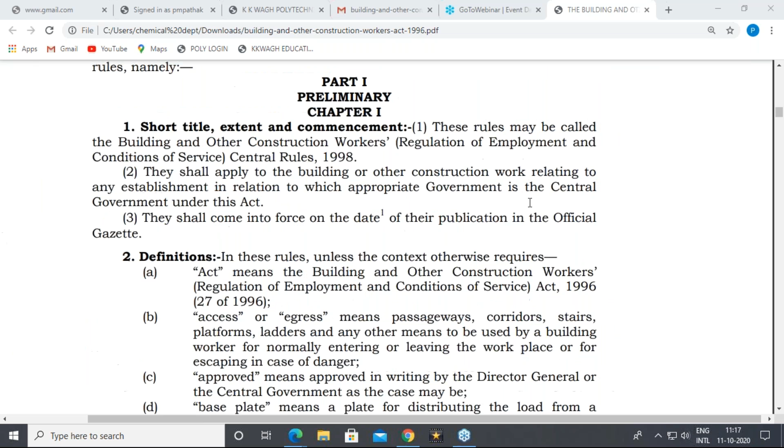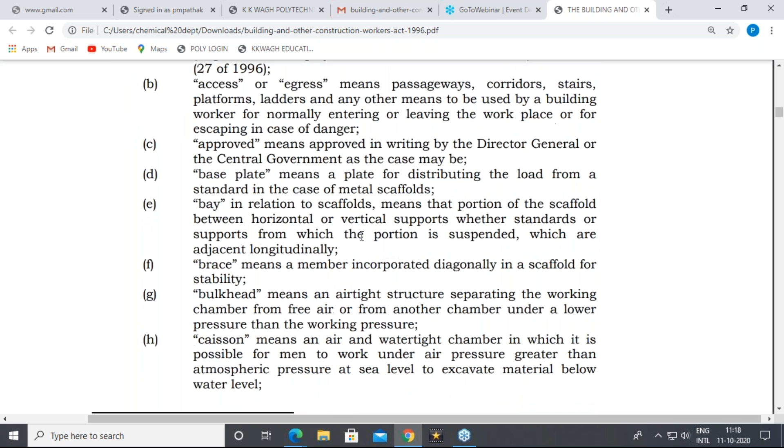So different definitions. The general definitions are act, then access or egress. Access or egress is nothing but the passageway, corridor, stairs, platforms, ladders and any other means to be used by a building worker for normally entering or leaving the workplace or for escaping in case of danger. Then approved, base plate, bay, brace, bulkhead, caisson are the different definitions given under Rule 2.

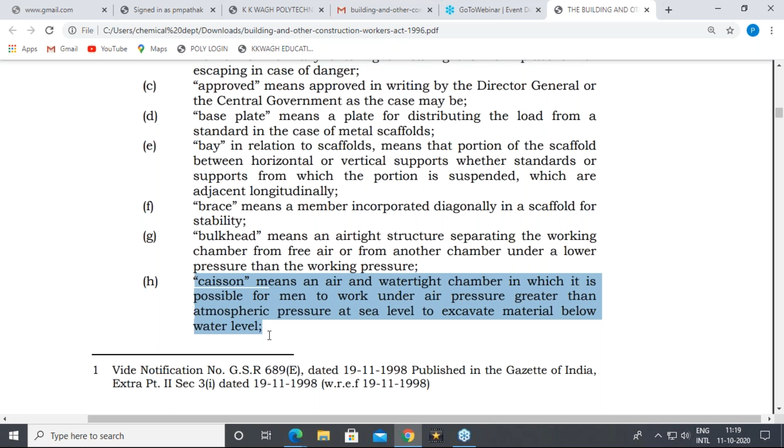So what is a caisson? It means an air and watertight chamber in which it is possible for men to work under air pressure greater than the atmospheric pressure at sea level to excavate material below water level. So if you want to work under water level, you can create air pressure which is more than the atmospheric pressure, and the building worker or other construction worker can work in this type of chamber, which is called a caisson. So this is the definition given under this rule.

Then cofferdam is another definition which is not known to common people. Cofferdam means a structure constructed entirely or in part below water level or below the level of the water table in the ground and intended to provide a place for work that is free of water. So it is a water-free place under the water table or water level, and it is called a cofferdam.

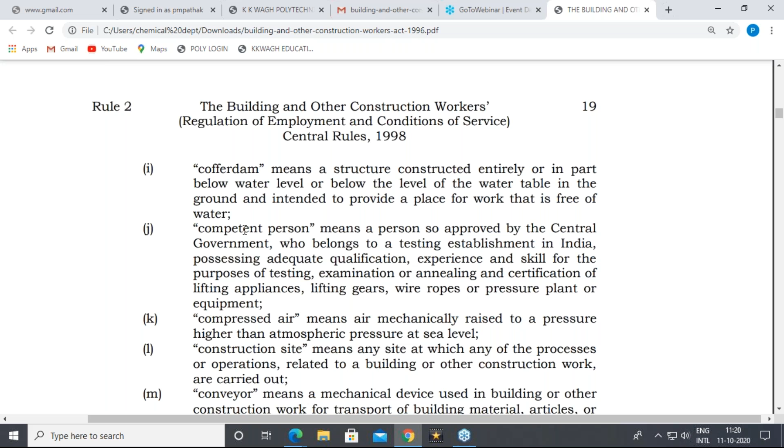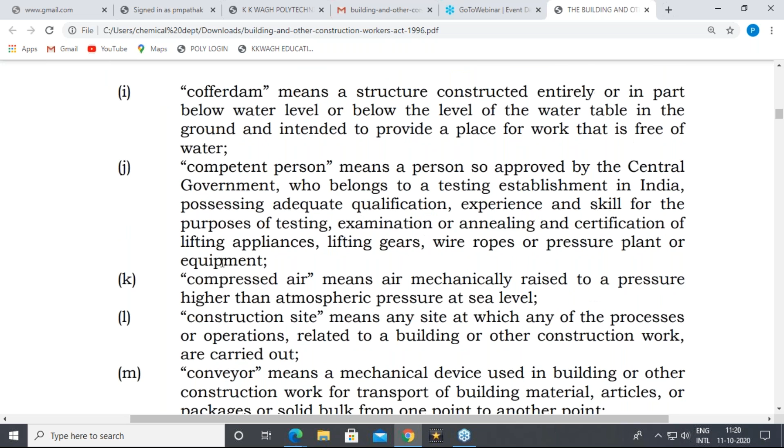Then competent person, we know the general definition of the competent person; that is the same and it is applicable to the building and other construction workers rules. Then compressed air, we know that definition. Construction site, we already discussed this establishment in the previous session. Then conveyor means a mechanical device used in building or other construction work for transport of building material, articles or packages or solid bulk from one point to another.

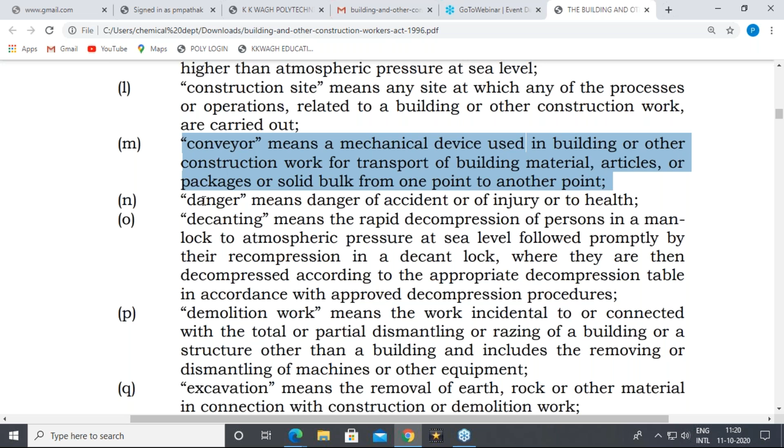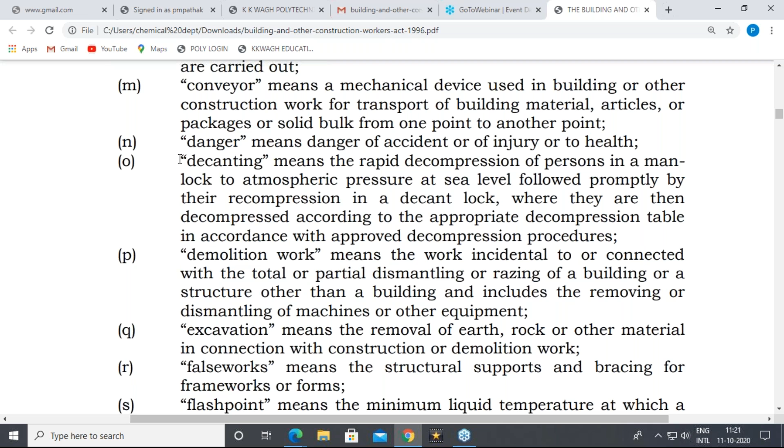Then danger is the general definition. Then decanting means the rapid decompression of persons in a manlock to atmospheric pressure at sea level, followed promptly by their recompression in a decant lock, where they are then decompressed according to the appropriate decompression table in accordance with the approved decompression procedures. So whatever decompression and recompression procedure is followed, that is called the decanting process.

Then demolition work. We have already discussed demolition work in one of the sessions. The work incidental to or connected with the total or partial dismantling or razing of a building or a structure other than a building, and includes the removing or dismantling of machines or other equipment. So dismantling of machines, other equipment or building material is called demolition.

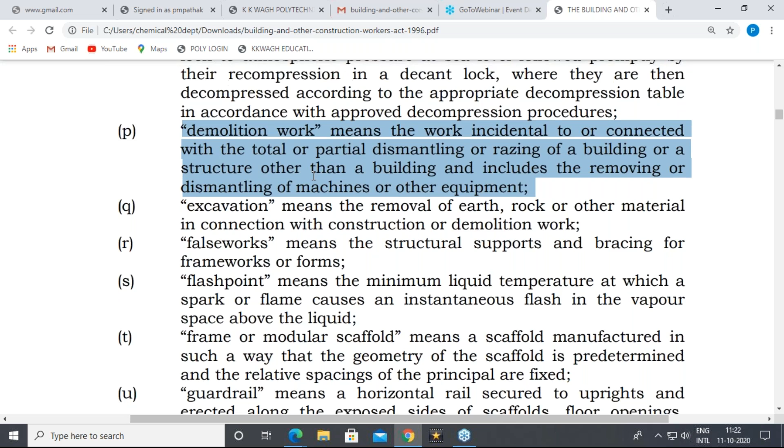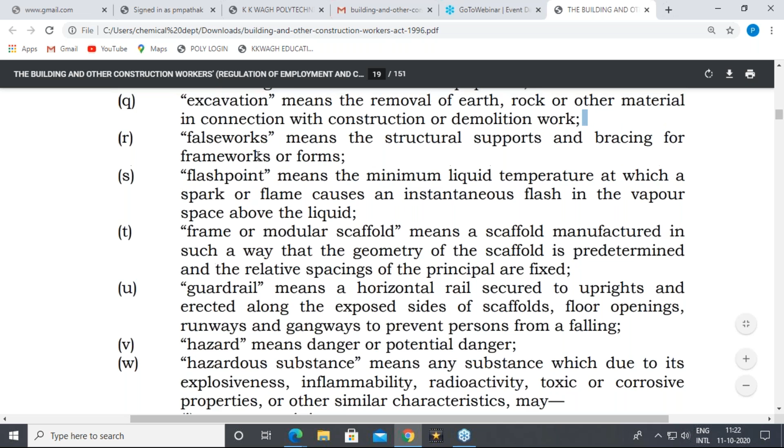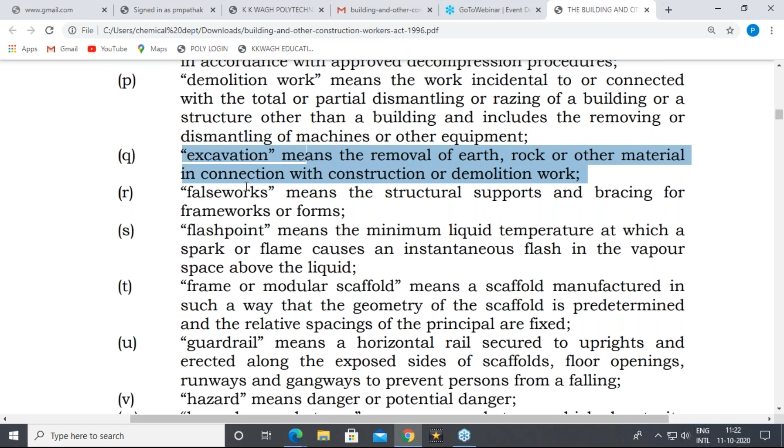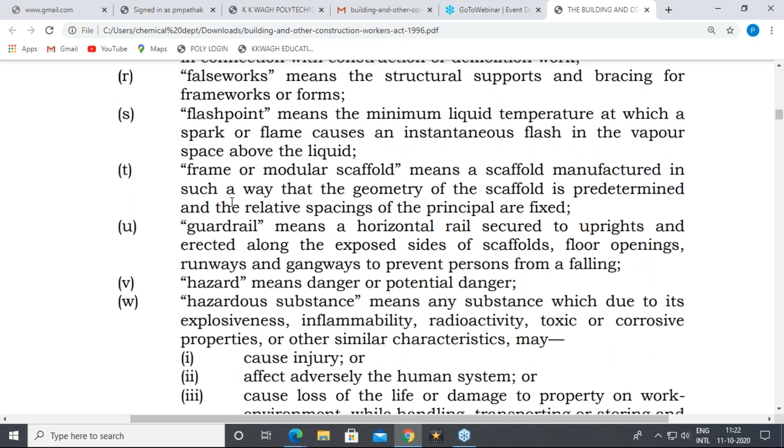Then excavation means the removal of earth, rock or other material in connection with construction or demolition work. Excavation equipment and activities are all discussed in the construction activities session. Then falsework means the structural supports and bracing for formwork or forms. Flashpoint we have already discussed in the safety of chemicals. Frame or modular scaffold we have discussed in ladders and scaffold structures.

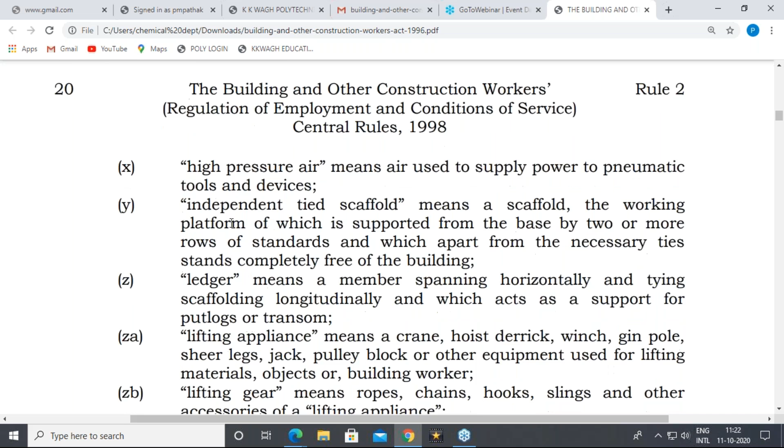Then guardrails, hazards, hazardous substance, high pressure air, independent tied scaffold, ledger, lifting appliances. At the construction site, we can use a crane, hoist, derrick, winch, gin pole, shear legs, jack, pulley block or other equipment used for lifting materials, objects or building workers. All these are called lifting appliances, whether the lifting is of building workers, objects, or any type of material.

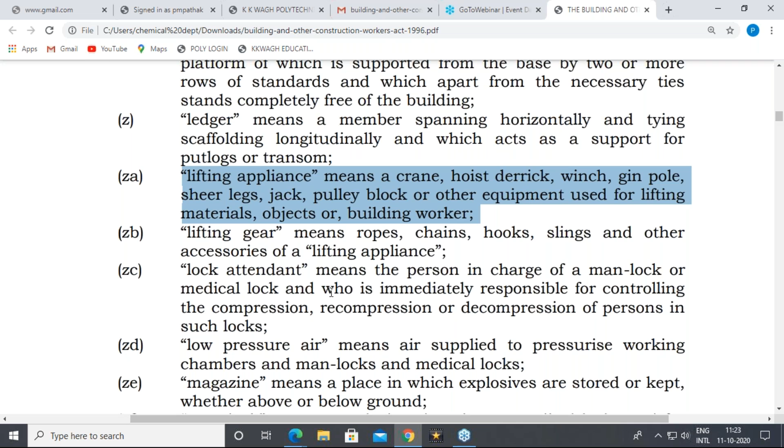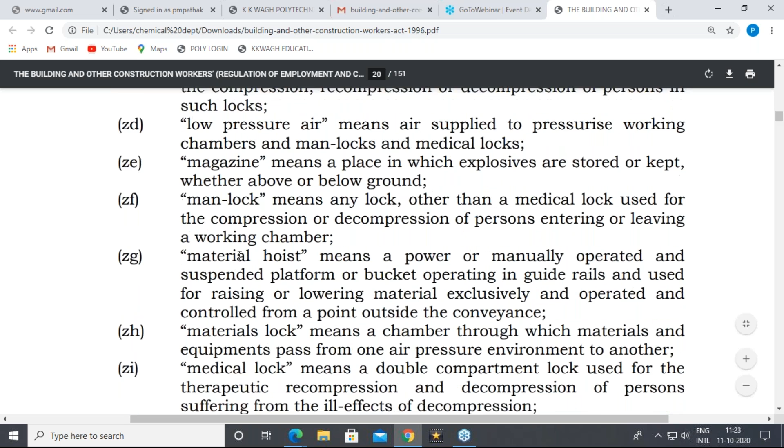Then lifting gear, lock attendant, low pressure air, magazine, man lock, material hoist, material lock, medical lock, the national standards.

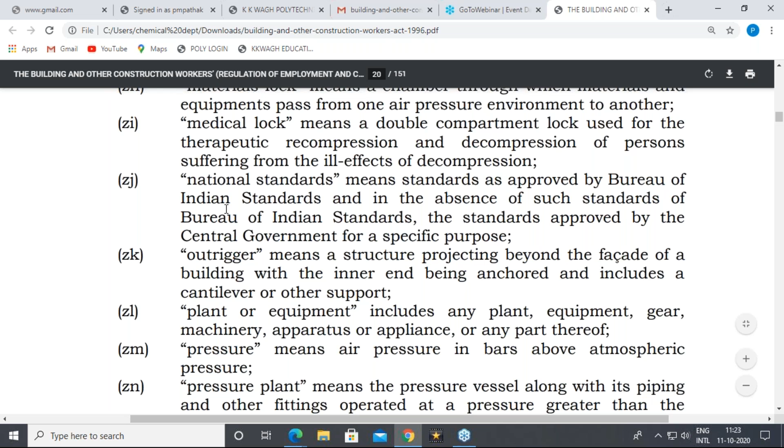So BIS is going to use in these rules also, that is why it is a national standard. Then outrigger means a structure projecting beyond the facade of a building with the inner end being anchored, and includes a cantilever or other support; that is called an outrigger.

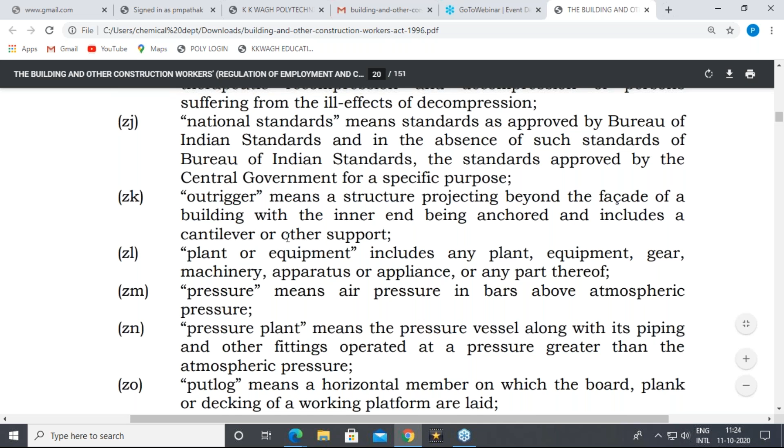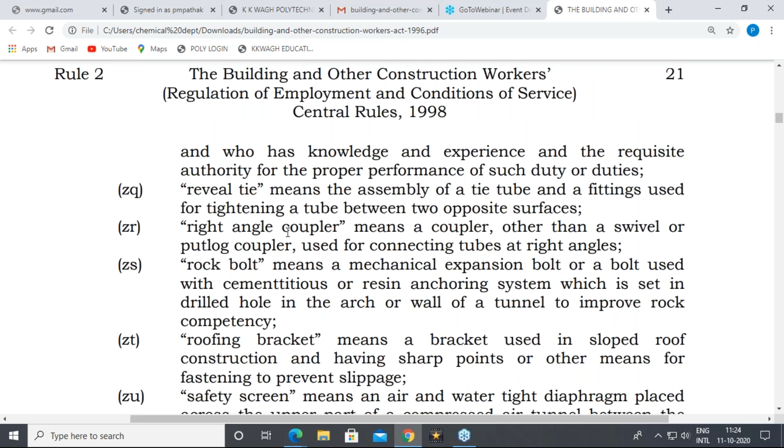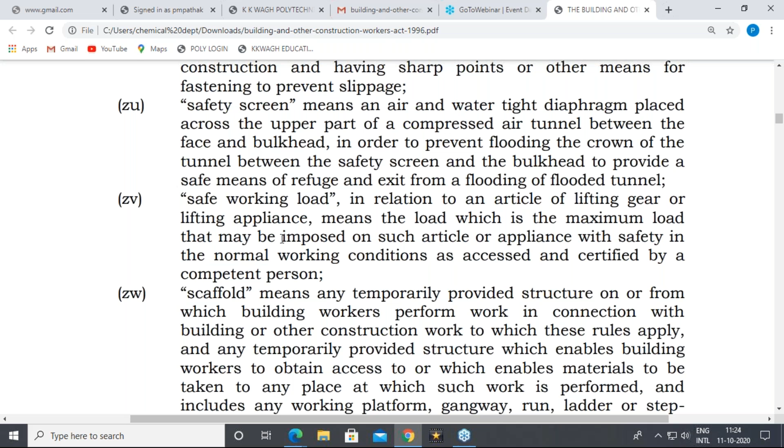Then plant or equipment, pressure plant, putlog, responsible person, that is nothing but the employer. Then reveal tie, right angle coupler, rock bolt, roofing bracket, safety screen, safe working load, scaffold, then schedule, segment, service shaft, shield, then sole plate, sound or good construction, sound or good material,

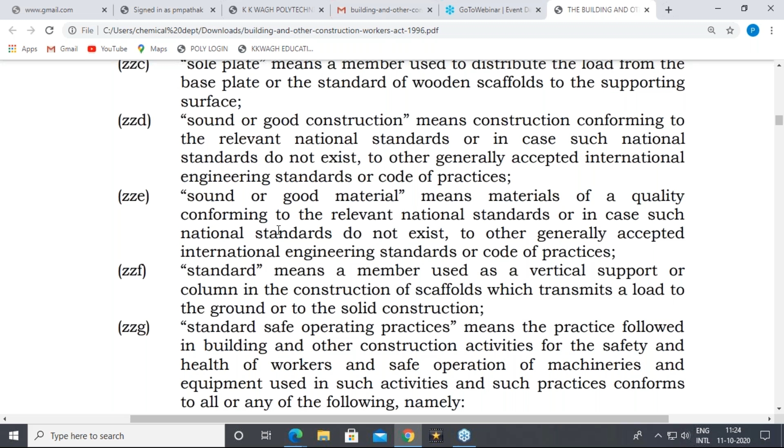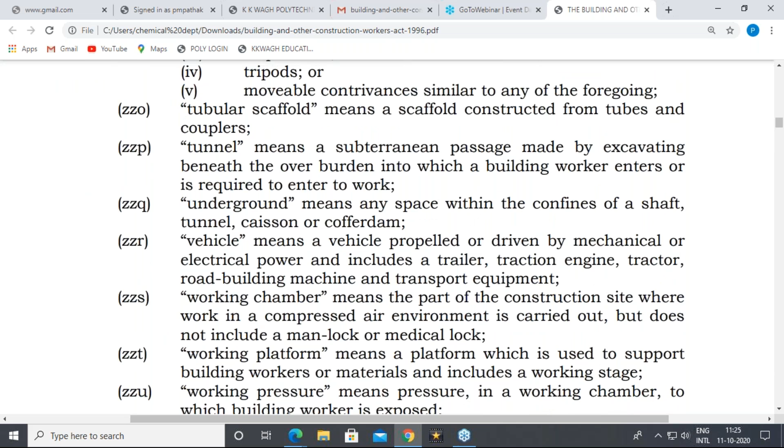standard safe operating practices, steel rib, then suspended scaffold, testing establishment, tie, toe board, transom, trestle scaffold, then tubular scaffold, tunnel, underground, vehicle, working chamber, working platform, working pressure, workplace. So these are the different definitions involved in rule number 2.

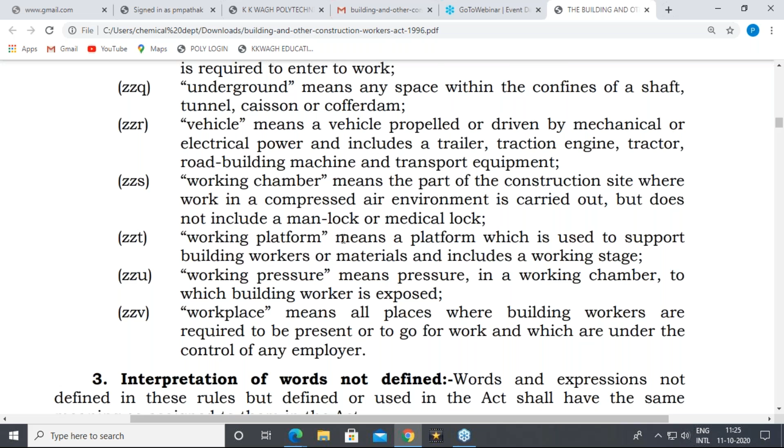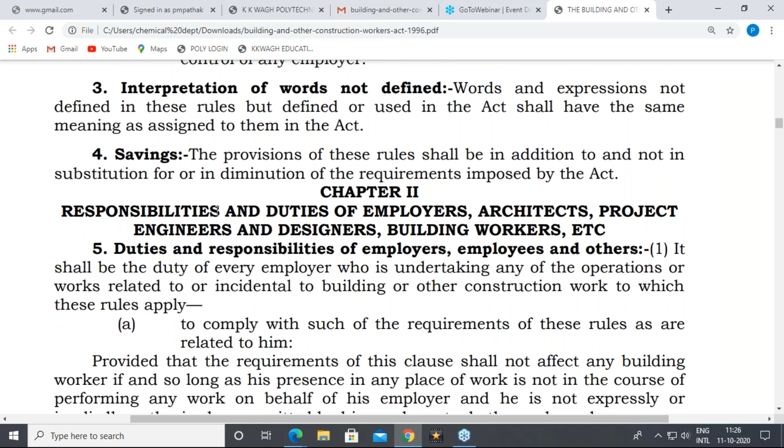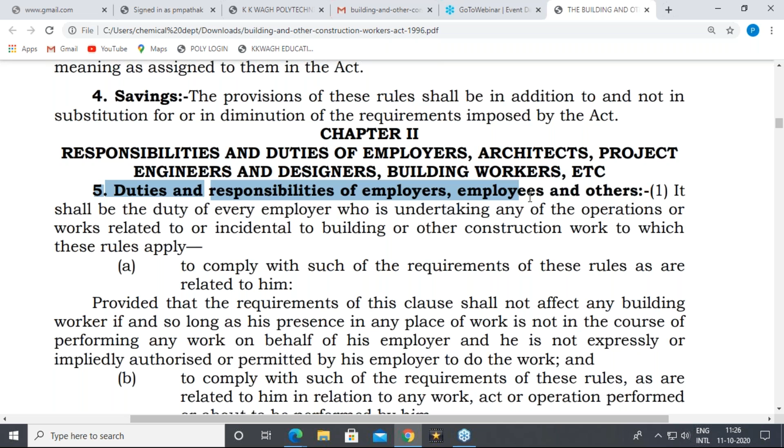Then chapter 2 gives you the idea regarding the responsibilities and duties of employers, architects, project engineers, designers, building workers, etc. So whatever the manpower involved in this establishment or the activities, all are responsible for a particular work. So all these responsibilities are given under chapter 2. So rule number 5 gives the idea regarding the duties and responsibilities of the employer, employees, and others.

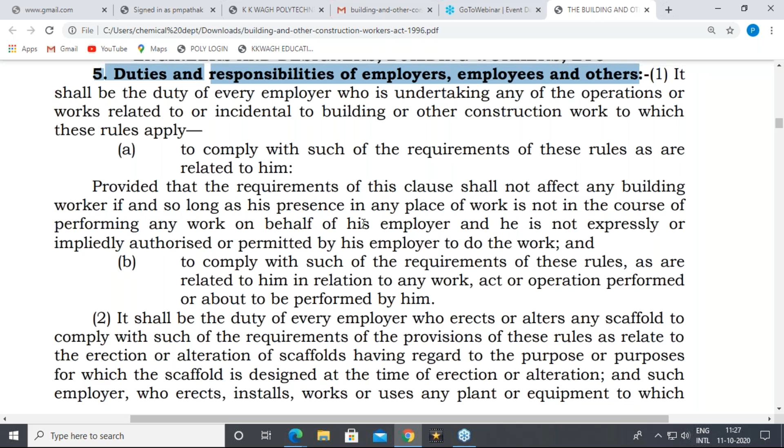So all these requirements given under the rules should be completed by the employer, and all the guidelines for compliance of these rules should be followed by the employees. So all the guidelines given by the employer should be followed by the employees. And the employer must have knowledge about this compliance, which is given under the different rules of this Central Rule 1998.

Then a contractor who is undertaking any of the operations or works to which these rules apply may appoint any artisan, tradesman or other person to perform any work or service under a contract of service. It shall be the duty of the contractor to comply with such of the requirements of these rules by these persons, that may be an artisan, tradesman or other persons.

So if there is a contractor in the establishment, then it is the responsibility of the contractor to complete all these activities mentioned in these rules, and that should be completed through persons like artisans, tradesmen or other persons. Then the employee's duty is to comply with the requirements and to cooperate with the contractor and the employer.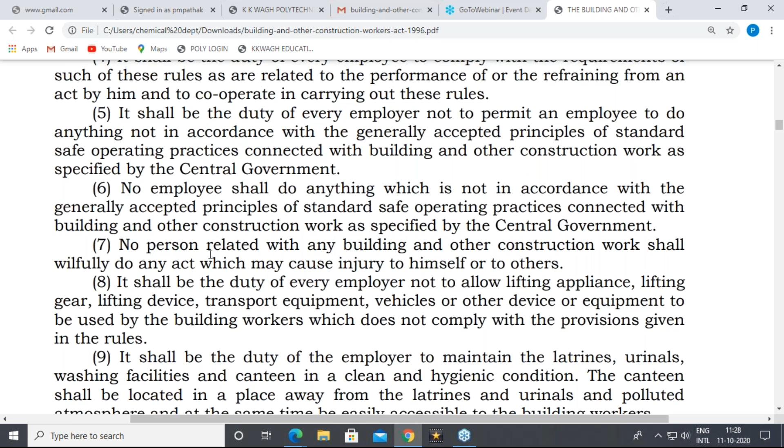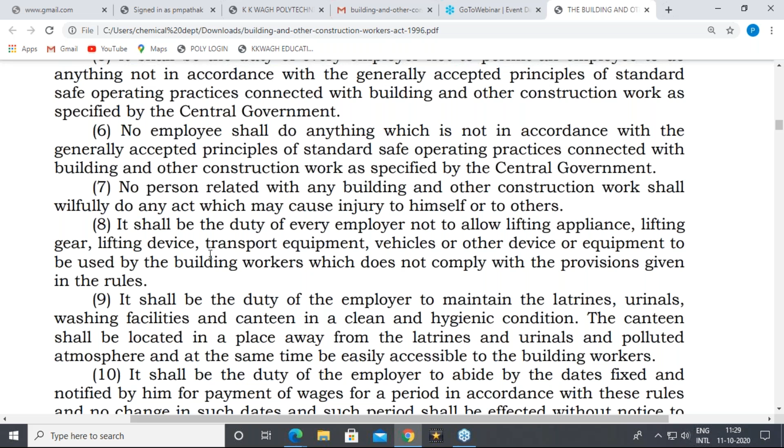And the employer's duty is to provide the different facilities required by the employees for safe work and safe practices, and also to provide facilities for lifting the material, lifting the objects or the different mechanisms. That may be transport equipment, vehicles or other things. Then it is the responsibility of the employer to maintain the latrines, urinals, washing facilities and canteen in a clean and hygienic condition.

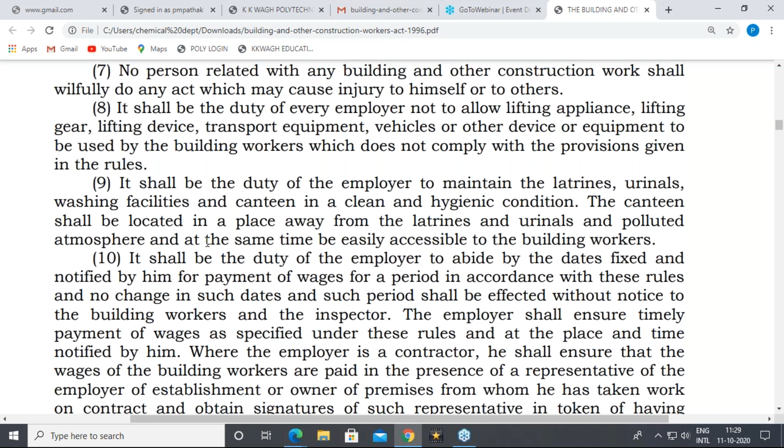Then it is the responsibility of the employer to abide by the date fixed and notified by him for the payment of wages for a period in accordance with these rules. So it is the duty of the employer to provide the wages time to time, that is the payment of wages in a particular period already decided between the employer and employees. Then it is also a responsibility of the employer to pay the contractor within a time period.

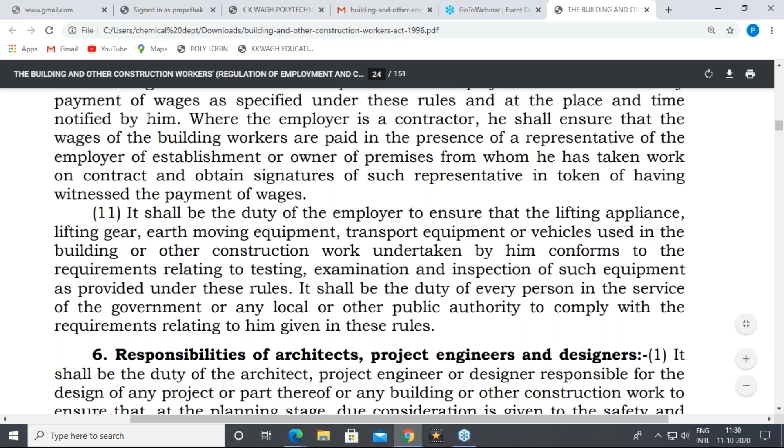Then it is a duty of the employer to ensure that the lifting appliances, lifting gear, earth moving equipment, transport equipment or vehicles in the building and other construction work undertaken by him conform to the requirements. Then there are provisions like testing, examination and inspection of the equipment used for earth moving, transportation, lifting, etc. So all these vehicles and equipment should be tested, examined or inspected by the competent person time to time, and that should be observed by the employee.

Then rule number 6 gives you the idea regarding the responsibilities of the architect, project engineers and designers. So whatever the establishment, building or other construction work, it should be designed taking into view the safety aspects, the health aspects and the long-term views.

So the designer is a key person, because before starting the actual construction activity, the designer should think about all these aspects, and mainly the safety of the workers, that is, the safety of the building workers.

Then after designing the safety establishment, the project engineer's and architect's role is to provide the guidelines: how to do this activity, how to complete all this establishment, what is the time for completing all these activities, what are the facilities provided for doing all these activities. That may be a material movement, a construction activity, a building worker movement, an object movement, a transport facility, etc.

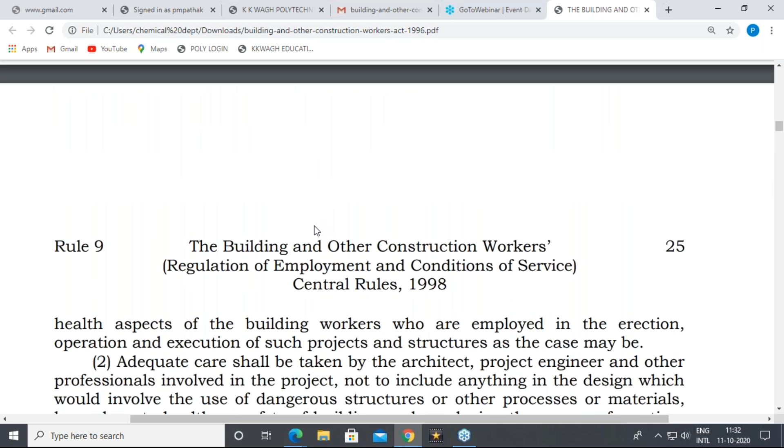So for all the things which are covered under the architect and project engineer, all these professionals should think about the building workers' health and safety first. They should also provide the guidelines for handling the hazardous materials involved in the construction activity.

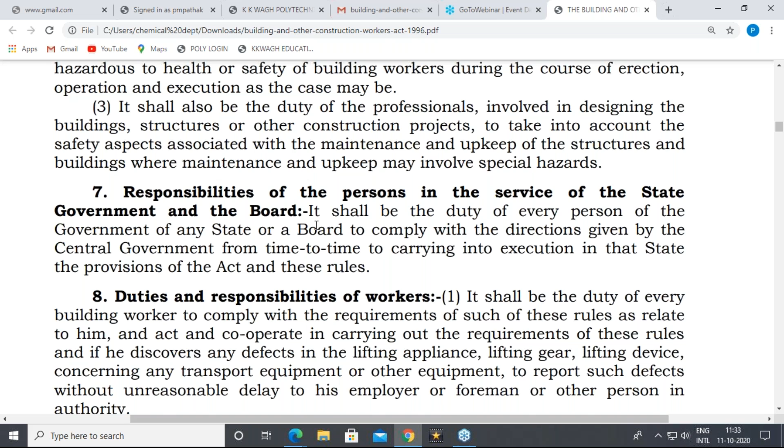Then rule number 7 is regarding the responsibilities of the person in the service of the state government and the board. So the persons who are involved in this activity also have the responsibility to follow the state government guidelines, central government guidelines, board guidelines, or the safety guidelines provided by the designers, project engineers, architect, or the employer.

Then rule number 8 is the duties and responsibilities of the workers. We have already mentioned that they must go through the trainings for handling the different equipment, that may be lifting appliances, lifting gear, lifting devices, transport, etc. Then the worker should cooperate with the employer, the project engineer, architect, or the designer in following all the guidelines given by them.

Then no building worker shall, unless duly authorized or except in case of necessity, remove or interfere with any fencing. So the worker should not interfere with the fencing facilities, gangways, gear, ladders, hatch coverings, life-saving appliances, lighting, or other things whatsoever required by the Act and the rules. If these are essential facilities provided by the employer as per the Act and rules, the worker should not interfere with them unless duly authorized or in case of emergency only.

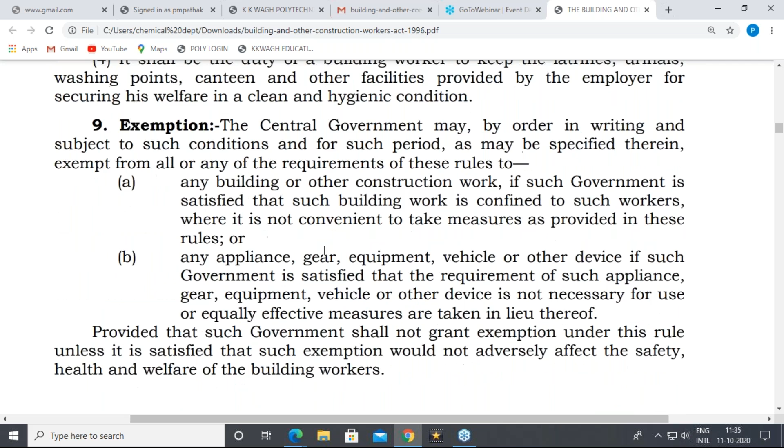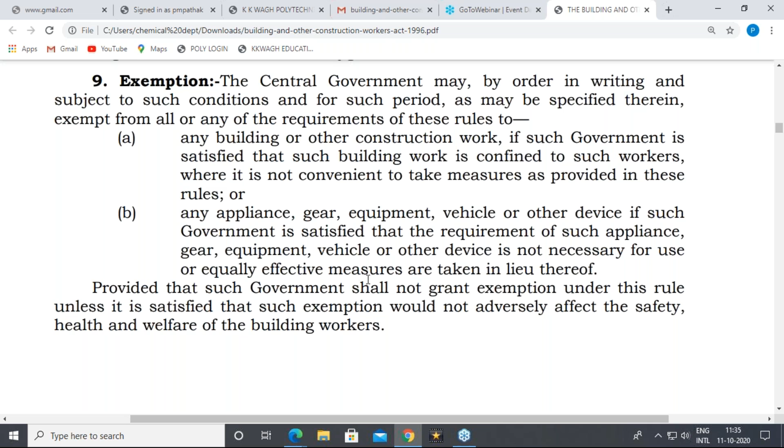Then rule number 9 is exemption. Some points, some facilities, some provisions may be exemption cases, but it should be decided by the central or the state government authority only. So these exemptions should be decided by the authorities only.

Then Part 2 of this Central Rules 1998 is the central advisory committee and registration of establishment. Chapter 3 under Part 2 is the central advisory committee. We have already discussed this central advisory committee in the Act 1996. It is similar in rule number 10: a chairperson of the central government, then 3 members of Parliament, of whom 2 shall be elected by the House of the People and 1 by the Council of States.

Then the Director General, member ex officio; the Director General, Labour Welfare, Ministry of Labour, New Delhi, member; the Director General, Factory Advice Service and Labour Institutes, Mumbai, that is DGFASLI, member. 4 persons, out of whom at least 1 shall be a woman, nominated by the central government representing the building workers. Then 4 persons nominated by the central government representing the employers connected with building and other construction work.

2 persons nominated by the central government, one from the national level association of architects or engineers and one from accident insurance institutions. So the guidelines for deciding these committee members are given in the Act 1996, and the detailed guidelines for specific members, the number of members, restrictions, and from where these members should be decided are all covered under rule number 10. Then terms of office.

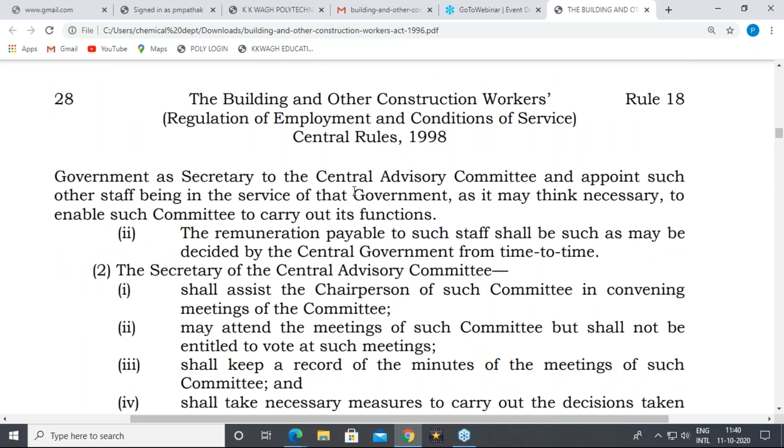Rule number 16, that is manner of filling vacancies. So we have already discussed that in case of resignation or removal of any member from the committee, you can fill these vacancies as far as the central government authorities and chairperson of the committee are concerned. Rule number 17, staff of Central Advisory Committee. So you can appoint the supporting staff under the chairperson and the different members.

Then rule number 18, allowances of these members. So the central and state government is going to decide the traveling allowance and the other allowances which can be given to these members. Then rule number 19 gives you the idea regarding the disposal of business. Then rule number 20 gives you the idea regarding the meetings of these central advisory committees. So there shall be at least one meeting in 6 months. That is the basic condition required. You can have more than one meeting in 6 months also, but that is the minimum condition.

Rule number 21 gives you the idea regarding the notice of meetings and list of business. So whatever the meeting points, the dates and timings and the location decided by the Central Advisory Committee, that should be communicated to all the members with the help of the notice.

Then quorum: no business shall be transacted at any meeting of the Central Advisory Committee unless at least 6 members of such committee are present in that meeting, which shall include at least one member of parliament. So that is the condition: at least 6 members should be present for that meeting, and at least 1 member of parliament should be there. Then and then only these decisions can be communicated to the other establishments or the employers.

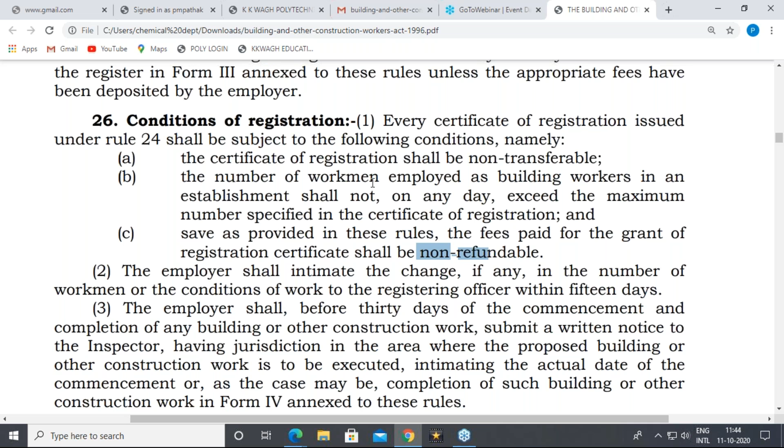Then fees for this registration: up to 100 workers, 100 rupees; more than 100 up to 500, 500 rupees; more than 500 workers, it is 1000 rupees.

Then chapter 5 is related to the appeals, copies of orders, payment of fees, etc. So you can file the appeal before the appellate officer if you are having some objection, if you are having some doubts, if you are deciding some points, or if you are going to give some suggestions, you can go for the appeal with reference to this rule number 28.

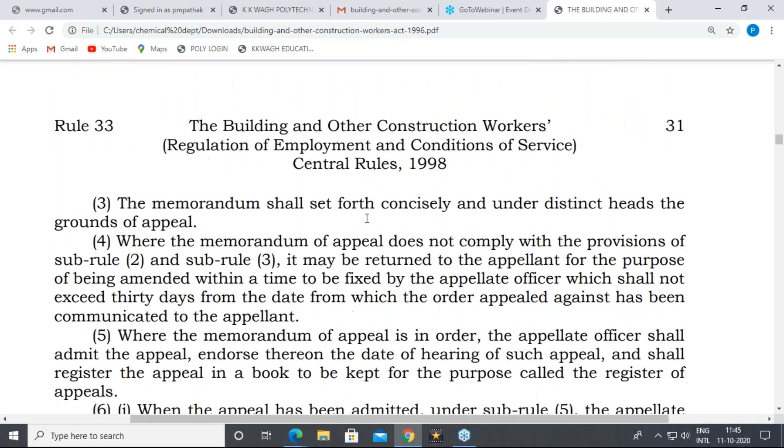Then 29, failure to appear on the date of hearing. So if you have appeal for something, and the date is decided by the concerned authority, and you are not going to appear for that hearing, then if the appellant does not appear, the appellate officer may dismiss the appeal for default of appearance of the appellant. So if you have not attended that hearing, then your appeal is automatically dismissed by the officer.

Then rule number 30, that is restoration of the appeal. So in case of dismissal of that appeal by the officer, it can again be restored for considering some of the specific cases. Then again, hearing of appeal: you have to attend this hearing, confirm, reverse or vary the orders appealed against, and determine the different points, and you have to mention the different decisions discussed in the hearing of appeal. Then you can ask for the copy of the registration order in the appeal itself.

Then regarding the payment of fees, you can ask about the fees which are already paid, the fee receipts and the registration fees, etc., with reference to this rule number 33.

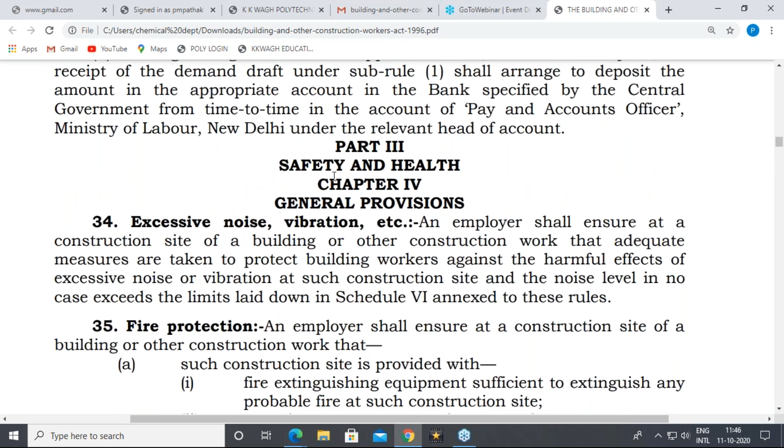Then part 3 is related to safety and health. So that is the important part as far as the building workers and this rule are concerned. So in chapter 4, there are general provisions. Rule 34 is related to excessive noise, vibrations, etc. An employer shall ensure at a construction site of a building or other construction work that adequate measures are taken to protect building workers against the harmful effects of excessive noise or vibration at such construction site, and the noise level in no case exceeds the limit laid down in Schedule 6 annexed to these rules.

So whatever limits are laid down in Schedule 6 of these rules, we have to follow these maximum permissible decibel limits decided in the schedule, and it is the responsibility of the employer to ensure the maximum permissible limits under this Schedule 6.

Then fire protection. So this is again the responsibility of the employer, that there should not be any fire incidents, and in case of such fire incidents, you have to protect the building worker from these types of fire hazards with the help of fire extinguishing equipment. And fire extinguishers should be available in sufficient quantities at that site, and adequate water supply should be provided as per the national standards, as per the BIS.

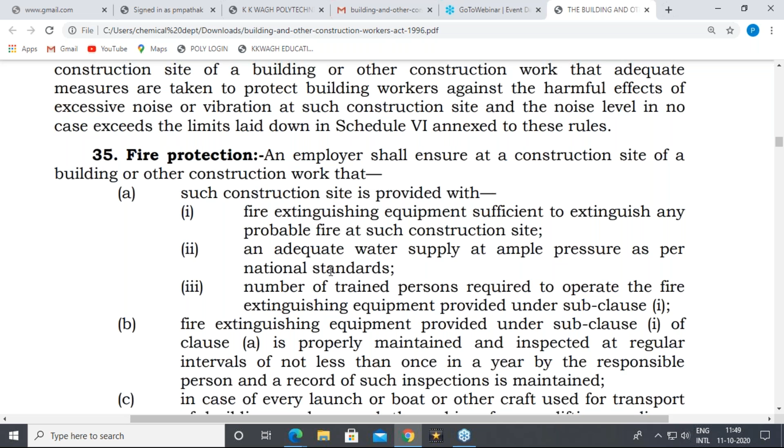And some people who are trained in fire extinguishment should be available to operate this extinguishing equipment at that site. So all these types of equipment and the trained people should be available at that site for protecting from fire.

Then emergency action plans. So as far as the different hazards are concerned, we must plan the emergency action plan to handle emergencies like fire and explosion, collapse of lifting appliances and transport equipment, collapse of buildings, sheds or structures, gas leakage or spillage of dangerous goods or chemicals, drowning of building workers, sinking of vessels, landslides getting building workers buried, floods, storms, and other natural calamities, which is prepared and submitted for the approval of the Director General.

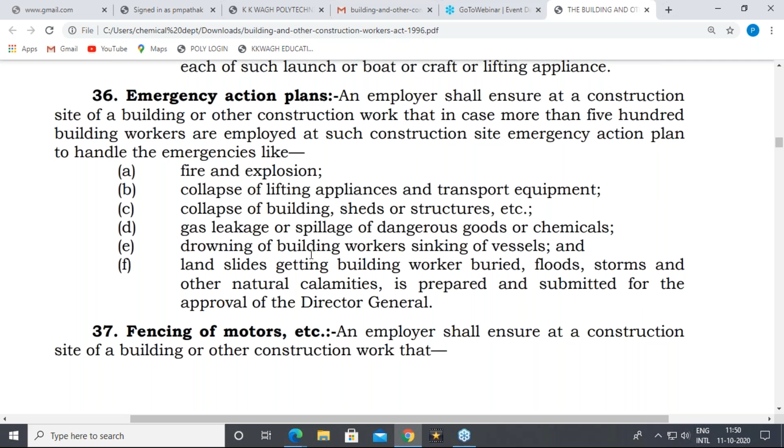So we must think of all these types of hazards, natural calamities or dangerous incidents, and in view of these incidents, we must plan the emergency action plan to handle these types of emergencies.

Then rule 37, fencing of motors. So all the motors which are used at the construction site and having different parts, like cog wheels, chains, friction gearing, flywheels, shafting, and dangerous moving parts of machinery, all should be fenced or lagged.

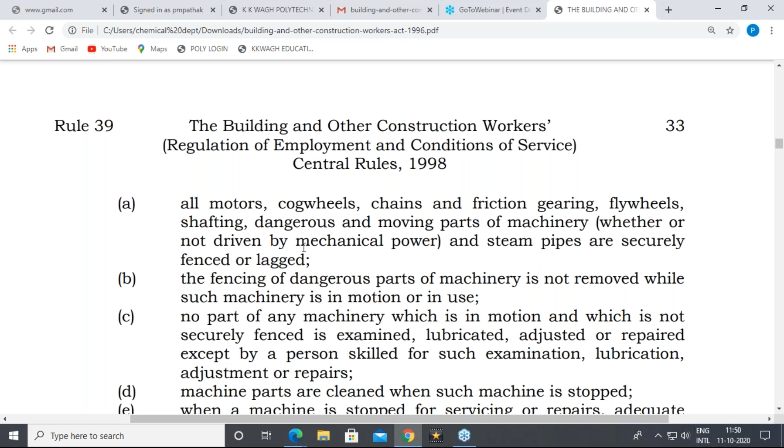So this fencing of dangerous parts of machinery is not removed while such machinery is in motion. So to avoid these types of accidents due to this revolving machinery, we must apply fencing to these types of machinery. No part of any machinery which is in motion and which is not securely fenced is examined, lubricated, adjusted or repaired except by a person skilled for such examination, lubrication, adjustment or repairs. Machine parts are cleaned when such machines are stopped. So repairing, maintenance, examination, testing, all these types of activities should be done.

Then rule number 38, lifting and carrying of excessive weights. So these guidelines are given under these rules which are not mentioned under the act. So an adult man can lift a maximum of 55 kg, then adult woman 30 kg, adolescent 30 kg, adolescent female 20 kg. So this is the maximum weight load that can be lifted by the adult man or woman or adolescent male or female as far as rule number 38 is concerned.

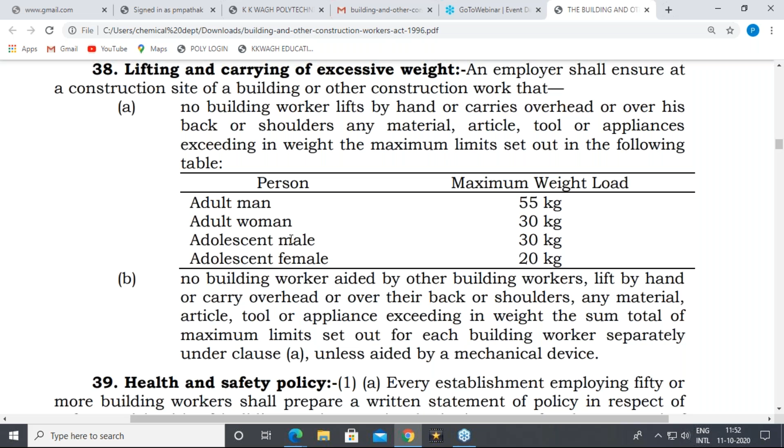Then 39 is related to the health and safety policy. So there should be a health and safety policy for that establishment, and that is the responsibility of the employer again. So all the commitments related to safety and health should be mentioned in that policy. All the organizational arrangements to carry out the points mentioned in the policy should be given, and the responsibility at different levels of hierarchy should be mentioned in that policy.

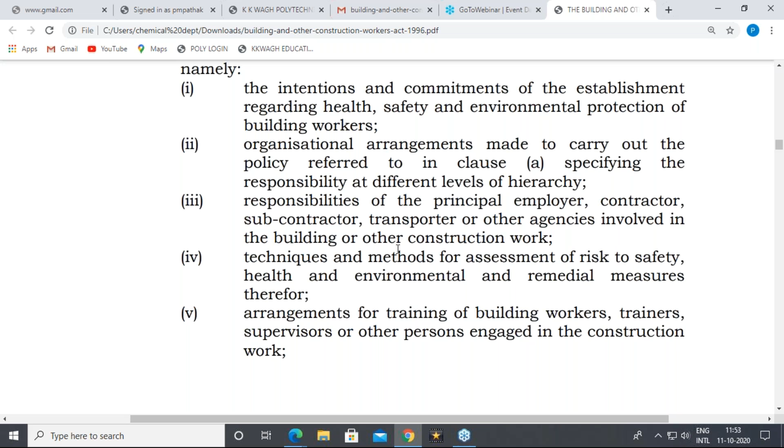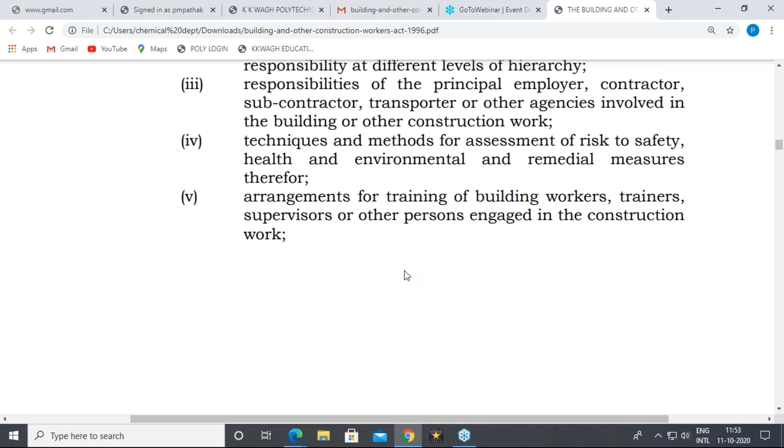Who is responsible, who is the principal employer, who is the contractor, subcontractor, transporter, or other agencies involved in the building or other construction work. So all these members should be involved in the framework of the safety and health policy. Techniques and methods for assessment of risk to safety, health and environment, and remedial measures therefore should be thought of while making these types of policies. All the arrangements for training of building workers, trainers, supervisors, or other persons engaged in the construction work should be thought of while designing these types of policies.

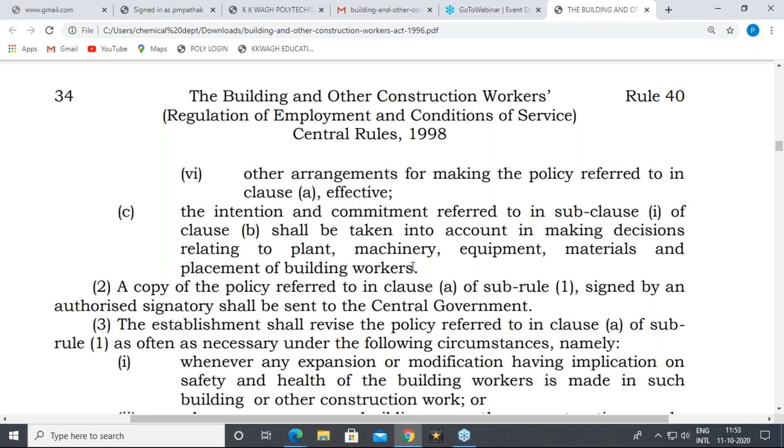So this policy should be referred, it should be effective, and it should be communicated to all the employees, to all the subcontractors or contractors, all the employees which are directly or indirectly involved in the establishment. So this is the responsibility of the employer to make such policies.

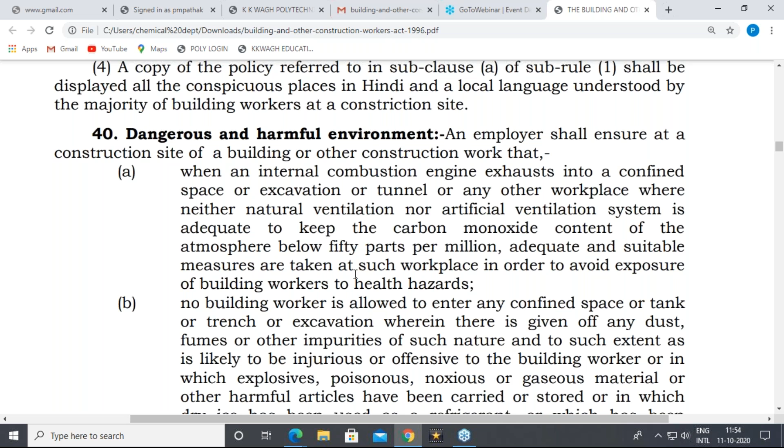Then rule number 40 is related to the dangerous and harmful environment. So in case there are dangerous machine parts, dangerous operations, or an oxygen deficient atmosphere, if there is a lack of natural ventilation, natural light, or if there is a possibility of carbon monoxide or carbon dioxide gases, then it is called a dangerous or harmful environment. If you are going to handle some hazardous substances, hazardous chemicals at that establishment, then it is also called a hazardous environment. If there is a chance of handling some processes in confined spaces, then it is also called

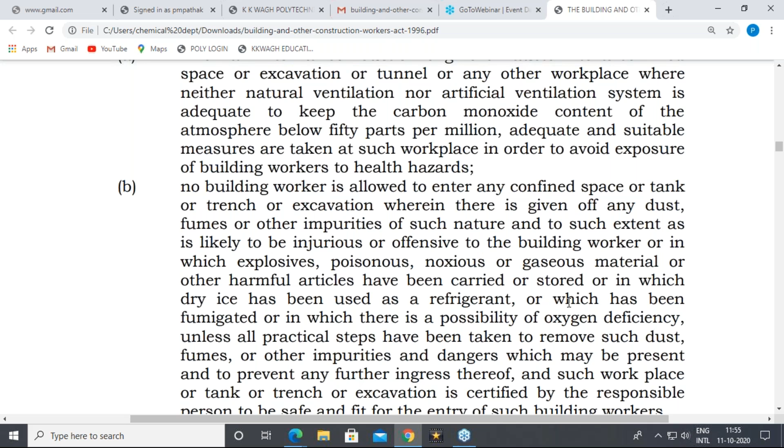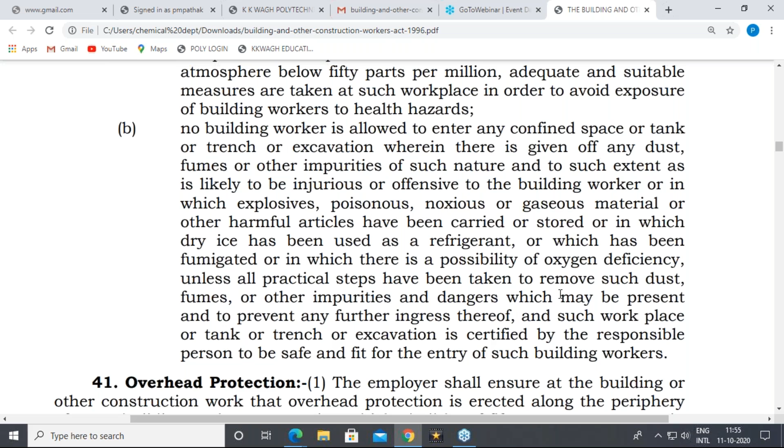a dangerous environment. So generally the confined spaces may be excavation work under the water table, under the ground, or some special cases where it is called an oxygen deficient atmosphere. In some cases, some workers have to work at height where an oxygen deficient atmosphere may be created. So all these cases are nothing but the dangerous and harmful environment. So the facilities for the building workers should be provided by the employer to handle these types of dangerous environment and

some places. So rule number 41, that is overhead protections. So in some construction activity, there may be a case of overhead protection, that is sub rule 1: it shall not be less than 2 meters wide and shall be erected at a height not more than 5 meters above the base of the building, and the outer edge of such overhead protection shall be 150 millimeters higher than the inner edge thereof, or shall be erected at an angle of not more than 20 degrees to its horizontal sloping into

the buildings. So there should be overhead protection given to the building workers, especially when we are working at the height of 5 meters from the base of the building. So this is the essential or compulsory condition, and in case of 2 meters wide or in case of more than 5-meter height, overhead protection is an essential condition.

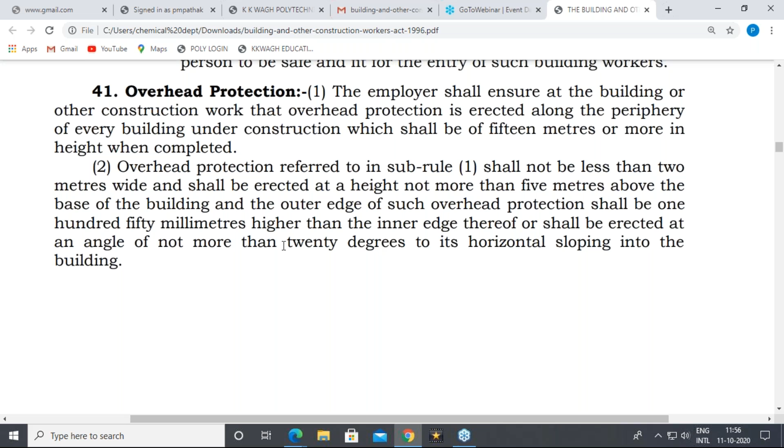The employer shall ensure that in building and other construction work, the area exposed to the risk of falling material, articles or objects is roped off or cordoned off or otherwise suitably guarded from the inadvertent entry of persons other than the building workers. So all these facilities should be provided, and all these observations and inspections should be done by the supervisor, by the concerned person for these types of work, that is overhead protection.

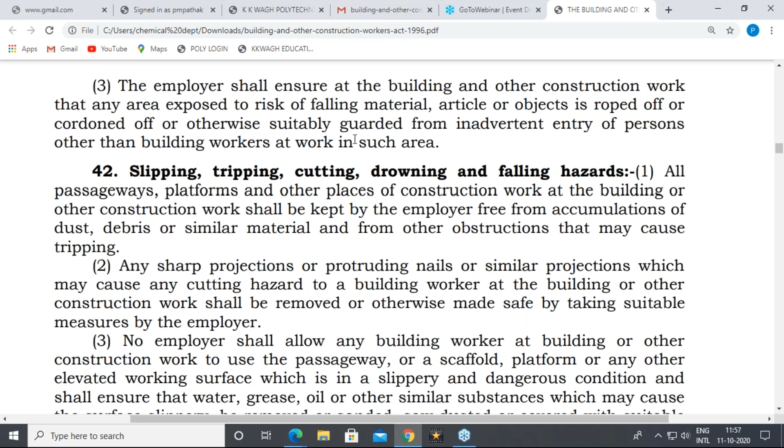Then slipping, tripping, cutting, drowning and falling hazards. So at the construction site, these are the normal hazards. There are some conditions where slipping may be there, tripping may be there, some cutting edges are also available at that site, and in case of a construction site which is near water bodies, that may be a dam, a lake, a river, or other small ponds, where the water is there, drowning may be a possibility.

And if you are going to work at height, then there may be falling hazards. So all the safety measures should be taken into account while doing all the construction activities by taking into account all these types of hazards.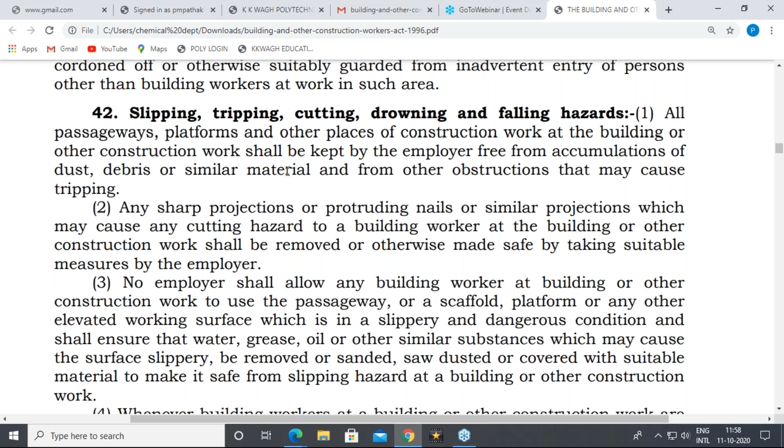Then dust, gases and fumes may be different types of hazards which are directly related to health. So it is a health hazard. All the precautions should be taken while doing the activities in this atmosphere where dust, gases or fumes are available. There may be provisions like personal protective equipment, that may be a dust mask, a respiratory type of mask, an airline respirator, or a self-contained breathing apparatus in case of an oxygen deficient atmosphere.

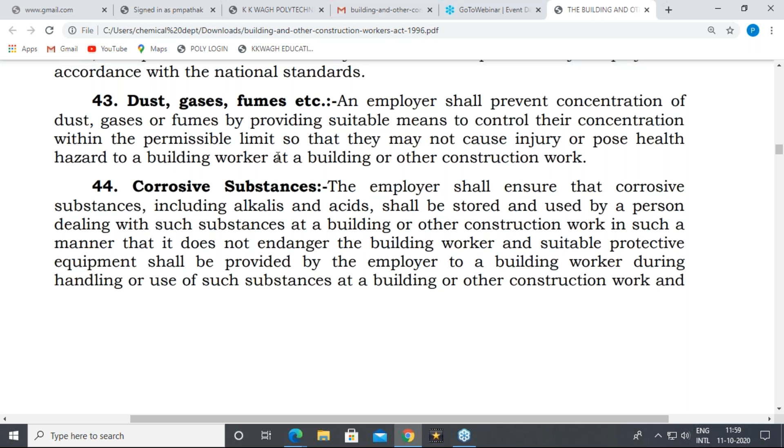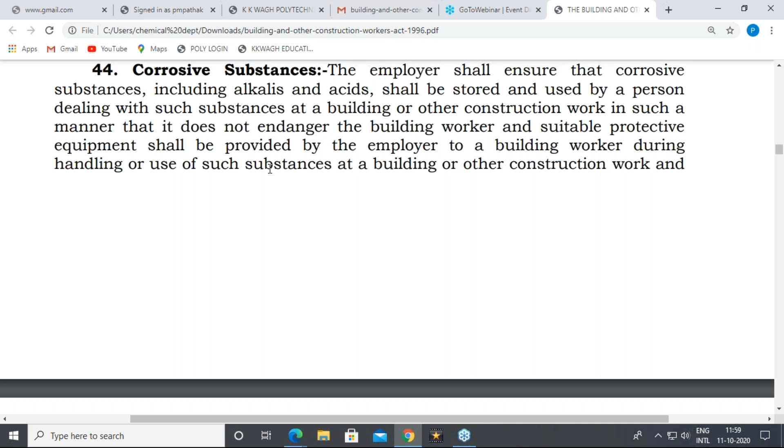Then there may be a chance where corrosive substances are available at that establishment. So we have to take care about the corrosive substances by applying anti-corrosive paints, anti-corrosive coatings, or we have to provide these corrosive substances in places where the possibility or rate of corrosion is minimized.

Then eye protection. Where chipping, cutting, welding and grinding operations are there at the construction site, there are chances of hazards to the eyes, and that is why personal protective equipment like goggles are provided, and the type of goggles mainly depends on the type of activity or operation carried out.

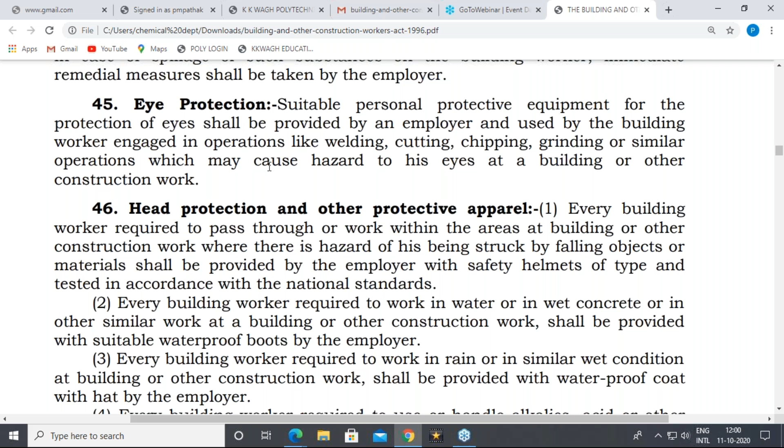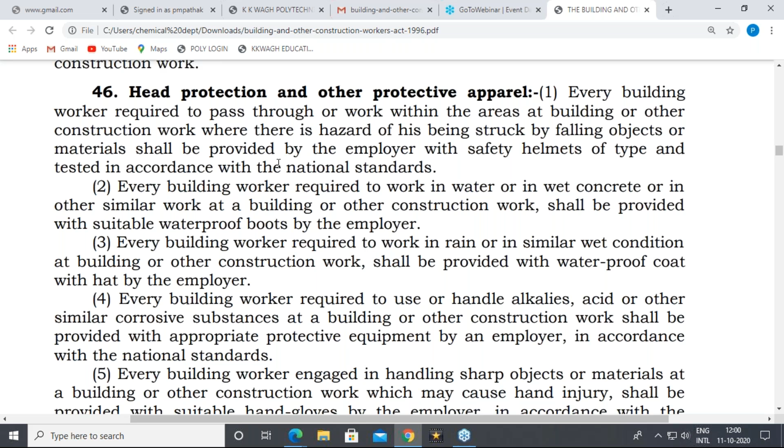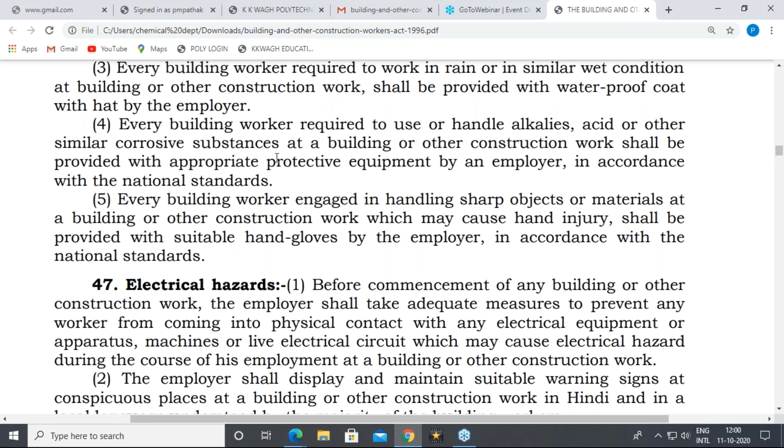Then head protection and other protective apparel. Hard hats and helmets should be provided to all the workers for protecting the head. Then the employer should provide acid proof or alkali proof hand gloves or shoes, etc., where corrosive substances, acids or some hazardous substances are going to be handled. So all these hazards should be taken into account, and on the basis of these hazards, the employer should provide these types of PPEs.

In case there is a chance of electrical hazards, electrical shocks, or if overhead lines are there at that establishment, then there is a chance of electric shocks or electrical leakage. So for that purpose, the employer should provide protection from these electrical hazards. There may be anti-static tools, anti-shock hand gloves, or anti-static soles which are provided in some safety shoes. So all these facilities having electrical proof properties should be provided by the employer.

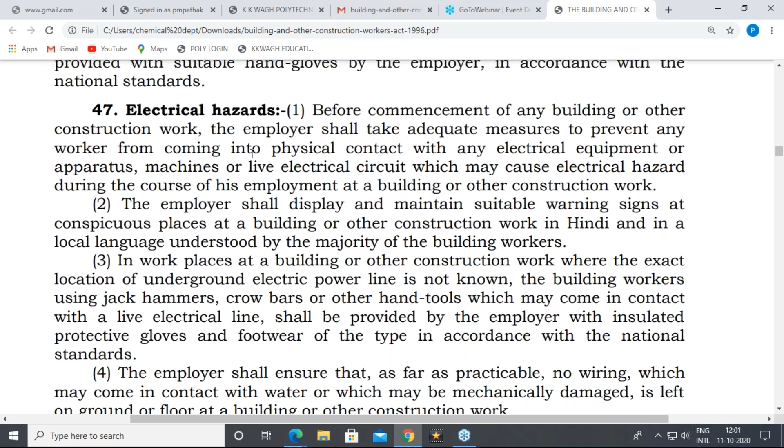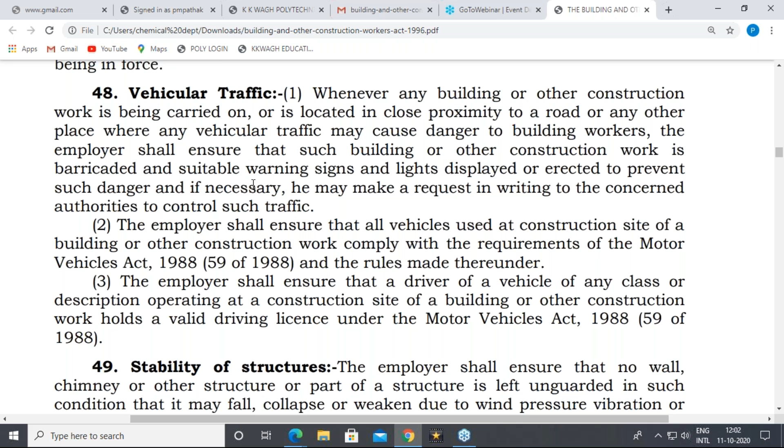Then in case of more vehicles at that establishment site, vehicular traffic should be controlled by the employer, inspector, or the concerned person with reference to the Central Motor Vehicles Act and Rules. Then stability of the structure should be tested and examined with reference to the BIS standards.

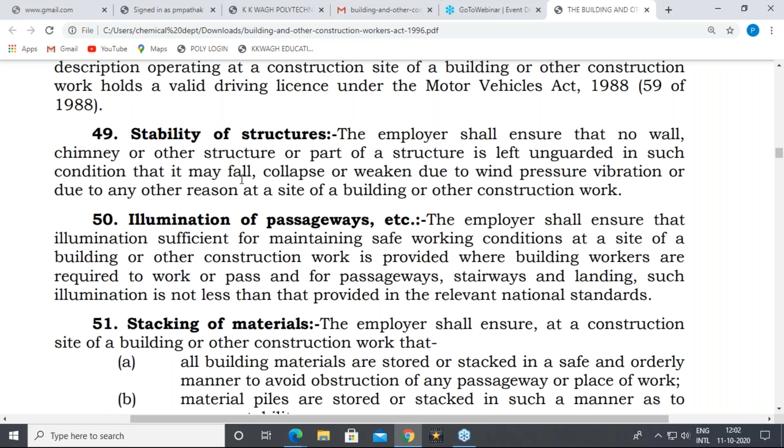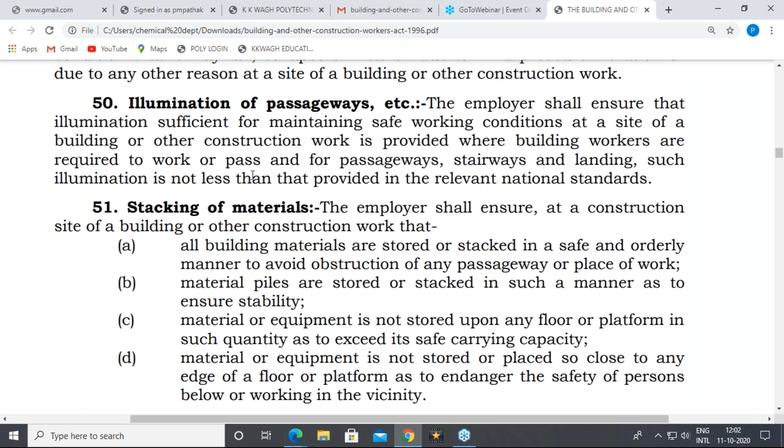Then there should be sufficient light arrangement, that is illumination, for the passageways, for the ingress and the different passages like passageways, stairways, landings, etc. So where the entries and exits are there, sufficient illumination should be given.

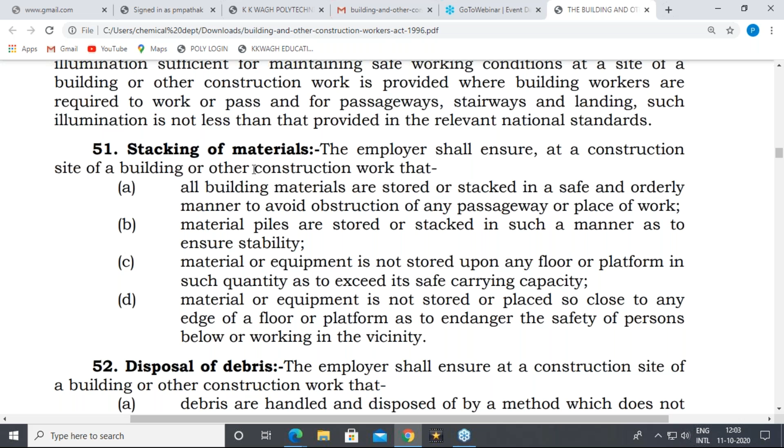Then stacking of materials. Some of the materials required for that site, like metals, stones, crushing materials or cements, etc., should be stacked in a particular manner by the employer in a particular place to avoid losses of these materials.

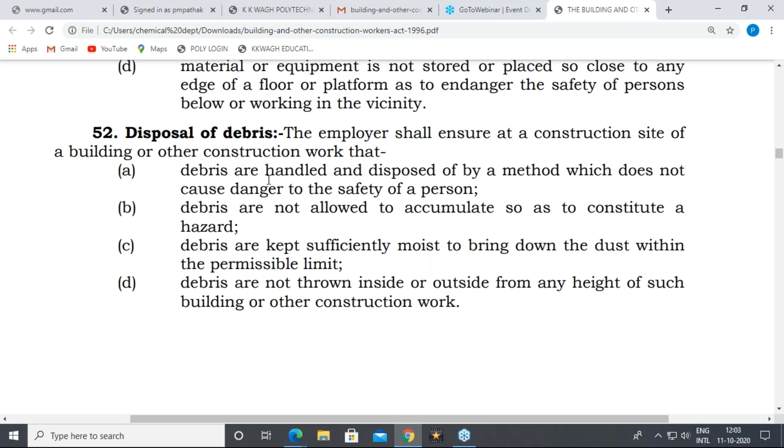Then disposal of debris. If debris is going to form at that construction site, it should be handled and disposed of by a method which does not cause danger to the safety of persons. So in a safe way, you have to handle or dispose of this debris. Debris is not allowed to accumulate so as to constitute a hazard. Debris is kept sufficiently moist to bring down the dust within the permissible limits. Debris is not thrown